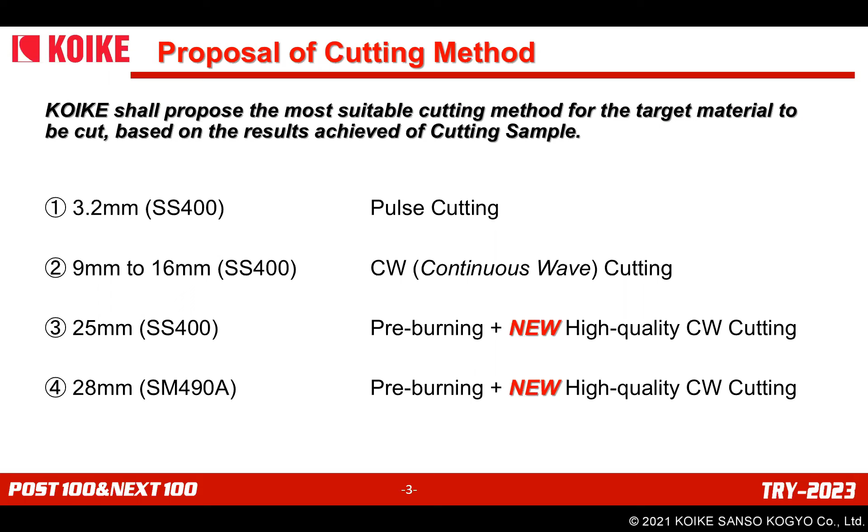Thick plate over 22 millimeters is usually difficult to cut, even by CW cutting with the 12 kilowatt single beam. The new 12 kilowatt DBC changes this, making it possible to cut plate over 22 millimeters effectively.

For steel plate with thick black skin like SS400 25 millimeters and SM490A 28 millimeters, this cutting achieves stable cutting and product accuracy. Even for unmanned operation, using this new high quality CW cutting with pre-burning, the quality is superb.

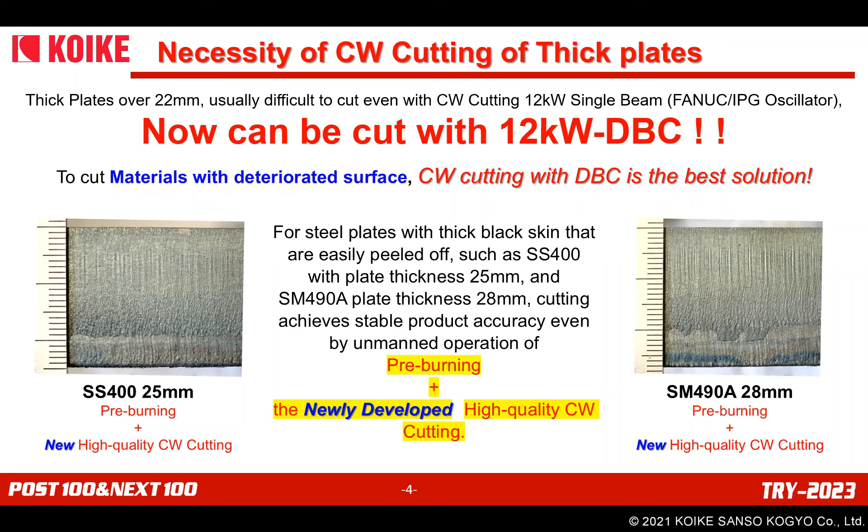Over the years, pulse cutting has been applied for cutting thick plates. The CW cutting has been applied to cutting thin plate and small items. However, due to the high output of fiber laser and advances in cutting technology, there have been some changes in usability.

But most importantly, what's the difference between these two types of cutting? What differs pulse oscillation from CW oscillation is the pulse frequency and the duty. While in pulse oscillation the duty changes between on and off, the CW oscillation is continuous.

As you can see here, the wave for the pulse frequency is changing on and off, and each one is a pulse. In the CW oscillation, there is no change - the duty is 100% continuous.

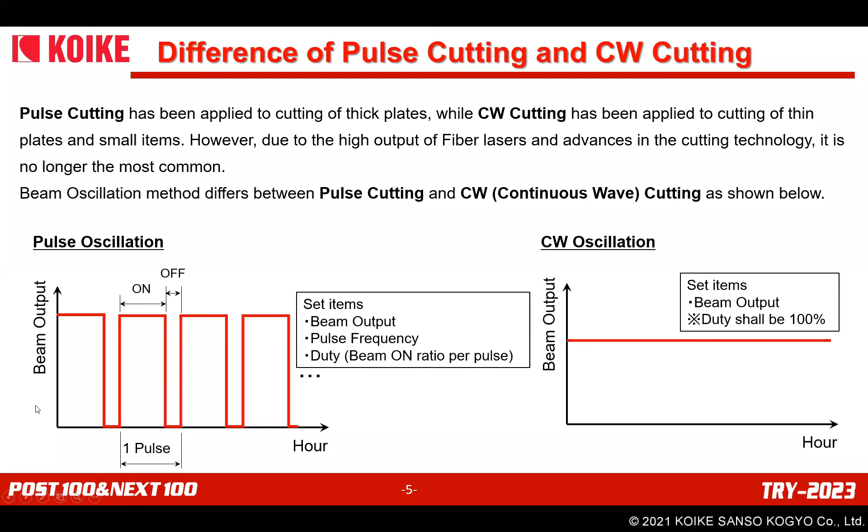Even though we are presenting some special function today, there is some material, as I said before, where we can use the usual cutting functions. So for pulse cutting, we can see some samples here - for the pulse cutting of 3.2 millimeter plate,

the cutting quality is almost the same between CW cutting and pulse cutting. So when cutting small shapes, like a small circle, the cutting speed must be reduced to achieve cutting accuracy. This reduces the beam output along with the deceleration. That is the reason pulse cutting is more effective for thin plates.

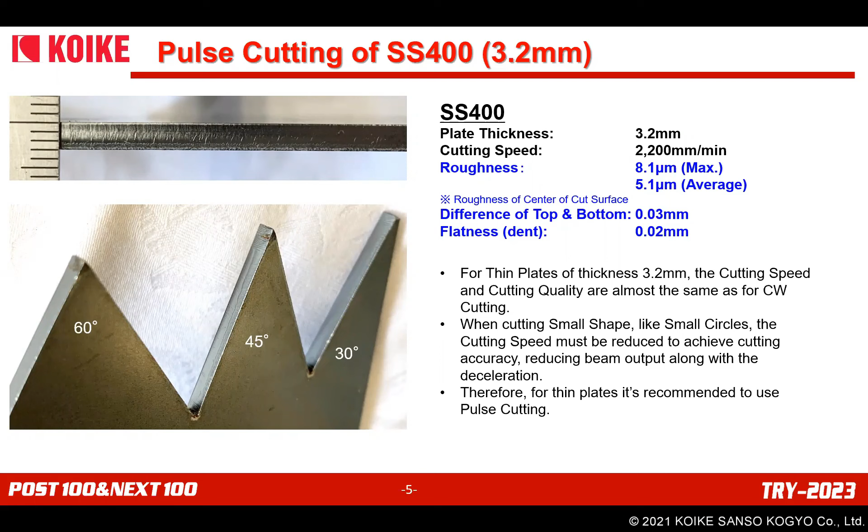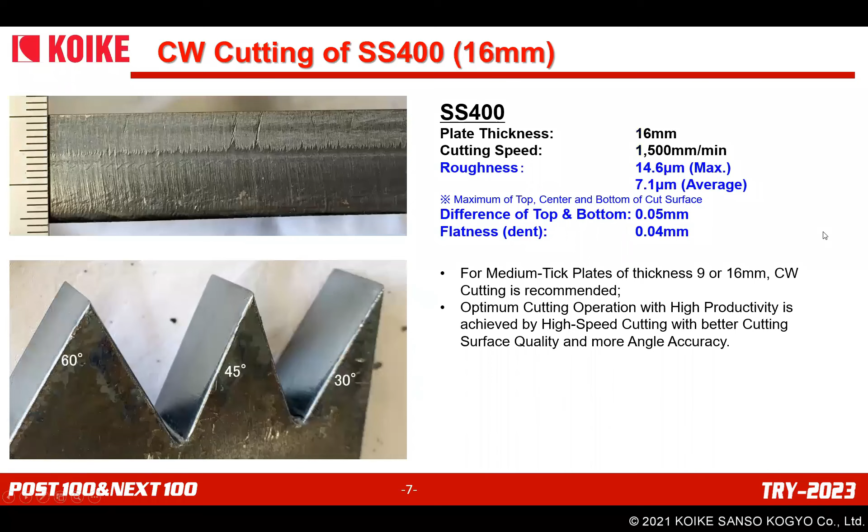For medium thick plates like 9 millimeters and 16 millimeters, the application of CW cutting enables optimum cutting operation that matches high productivity by high speed cutting with cut surface quality and acute angle accuracy. So the difference between the top of the cutting and the bottom of the cutting will be very small when you use CW cutting, and the surface quality is also better. Same for 16mm here.

When you start to cut thick plates by pulse cutting, the kerf width is very narrow. In this case, the flow of molten metal needs to be optimized by using a large nozzle diameter to increase the assist gas supply. But this also increases the difference of the vertical angle, so the difference between the start point, cutting point, top point and bottom will be much bigger when using a large nozzle diameter.

Also, the scratch and appearance will be bigger. In case of material with large amounts of chromium and silicon, the molten balance in the narrow kerf will be lost, and surface roughness, gouge, and dross adhesion will be even more in this kind of material.

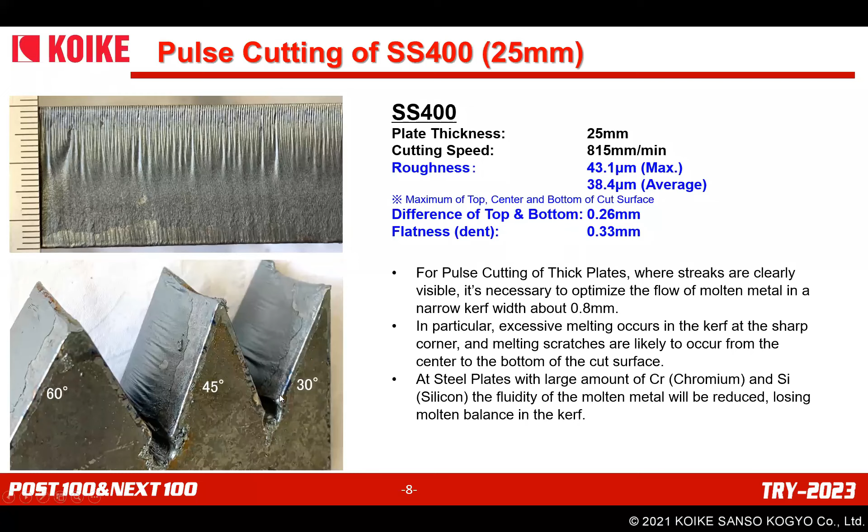Also, the sharpness in the corners will be affected because of the kerf width. But in CW cutting, the high output improves the cutting speed, which reduces the kerf width. It improves the flow of the molten metal and leads to a better cutting surface. So comparing pulse cutting and CW cutting, we can see an improvement in the roughness and also in the corners.

Although it has advantages improving productivity and sharpness quality, the current CW cutting technology may require some post-treatment of the cutting material, like oxide scale removal from the bottom side of the cutting material.

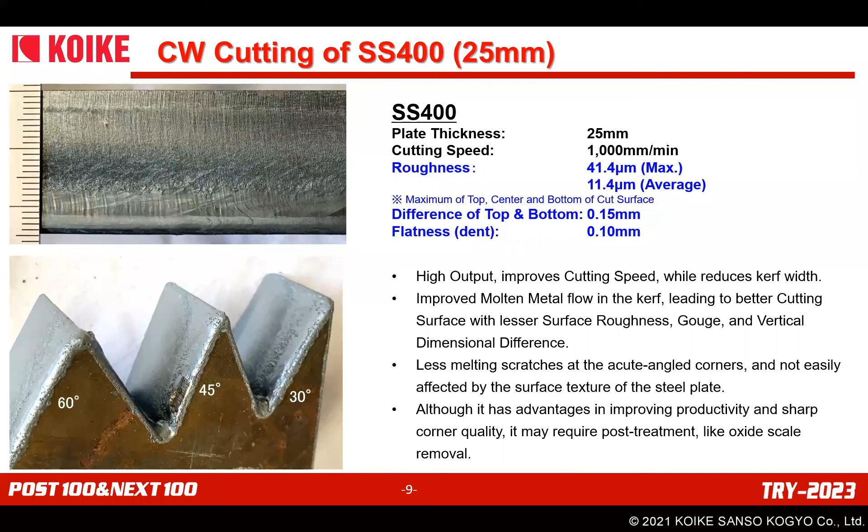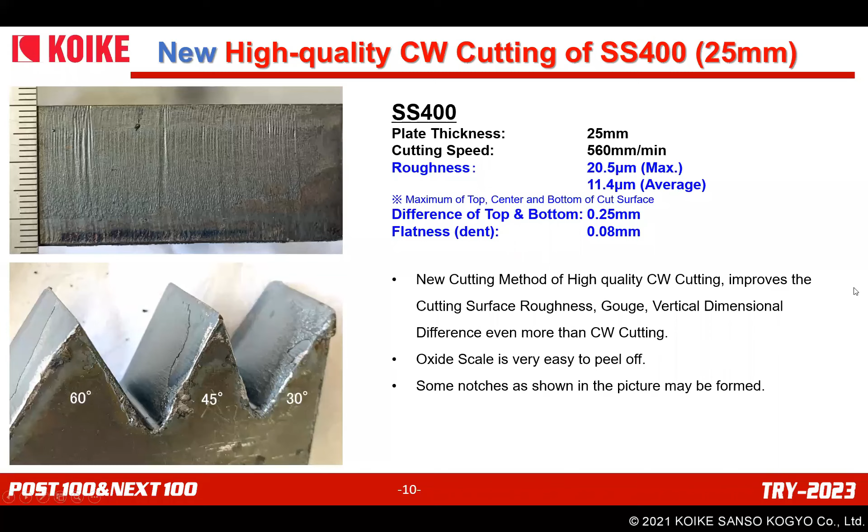The corner is also sharper and a little bit better than the previous features.

But when we apply the newest technology, the new high quality CW cutting, together with pre-burning, the cutting quality is even improved. In case of steel plates with thick black skin, performing pre-burning with high quality CW cutting provides a better cutting surface with almost no notches, no scratches here.

Cutting speed will also be slower, but applying these cutting methods to unmanned operation improves the results significantly by eliminating most of the negative factors of unmanned operation. It means even the stop for failed cutting will be reduced significantly.

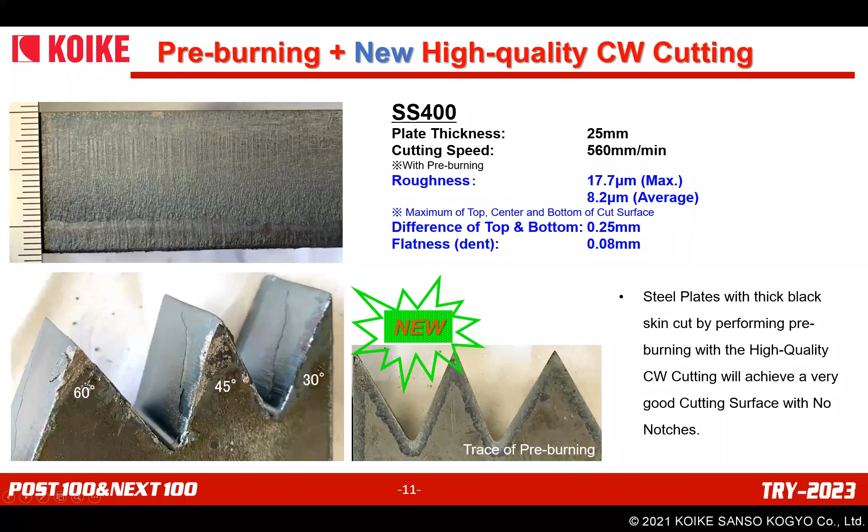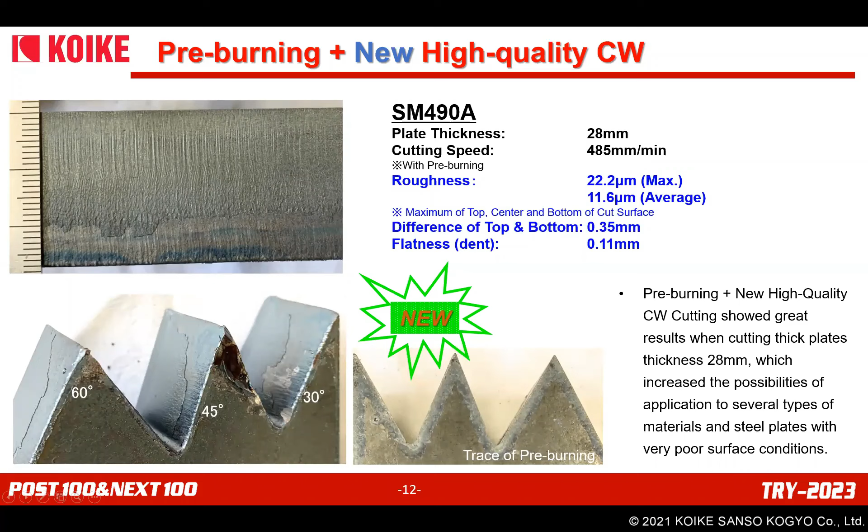So as we saw in the previous cutting samples, cutting of thick material with CW cutting single mode is not an easy job. But what's the reason for this? The thicker the plate is, the more beam output is necessary to increase the melting capacity. But the molten metal cannot pass through the narrow kerf the CW cutting creates. So it causes surface roughness, burning, as you saw in the example, and reduces the cutting quality to the point that it's sometimes not acceptable.

Of course, defocusing the beam to widen the groove may be effective, but in this technology, CW cutting single beam, the cutting becomes very unstable due to deterioration of beam quality. We can see this: when the beam is far from the plate, the deterioration is worst, and that is the problem it creates.

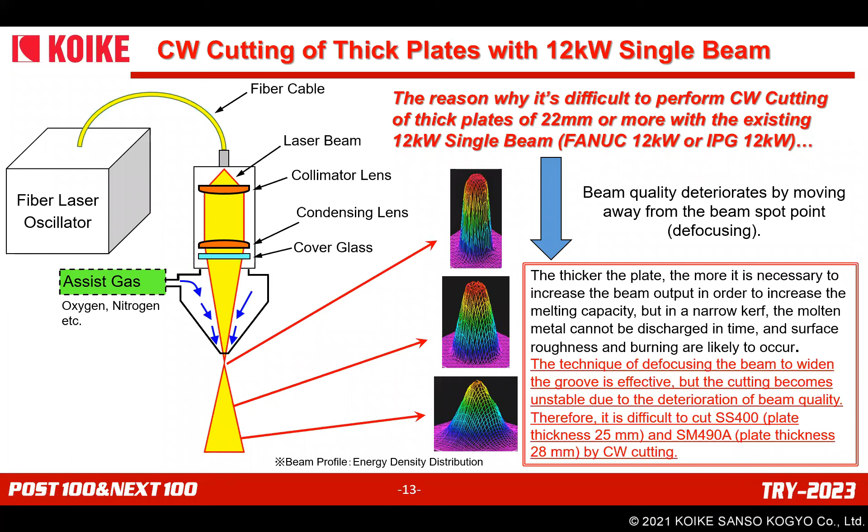So what is exactly the DBC technology? We saw the single beam. We understand well what the single beam is, and what the DBC is with dual beam control. While the single beam mode has only the central beam, the DBC has a combination of a central beam with a ring beam.

And in the DBC, the beam control makes it possible to control both beams individually. Doing that, we can adjust each one of the beams separately to find the best condition according to the material type, surface condition, and the surface temperature during the cutting.

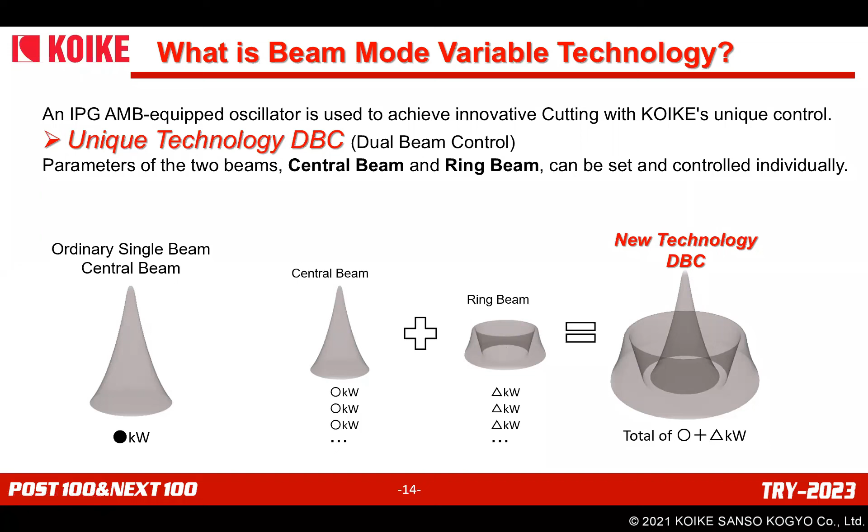So the main difference between the single beam and the DBC, the dual beam, is: in the single beam, the laser output is only one beam, while in the DBC the laser beam is divided into central beam and ring beam.

For single beam, it makes fast cutting into thin plates. On the other hand, it requires an increase of output for medium thick plate. But doing that, there's a risk of burning increasing depending on the difference in material surface condition and surface temperature. It's not possible to achieve stable cutting when cutting medium to thick plates using the single beam, since there is a limitation to high beam output and variable beam shape in the single output.

But in case of the DBC, it can change the beam shape in several ways, reducing the heat applied to the plate, preventing burning from happening, and you can find the best combination of beam output and shape according to each kind of material, surface condition, and surface temperature, as I said before. Also, cutting medium plate and thick plate, it's possible to achieve stable cutting with this feature, even for rust material and thick material.

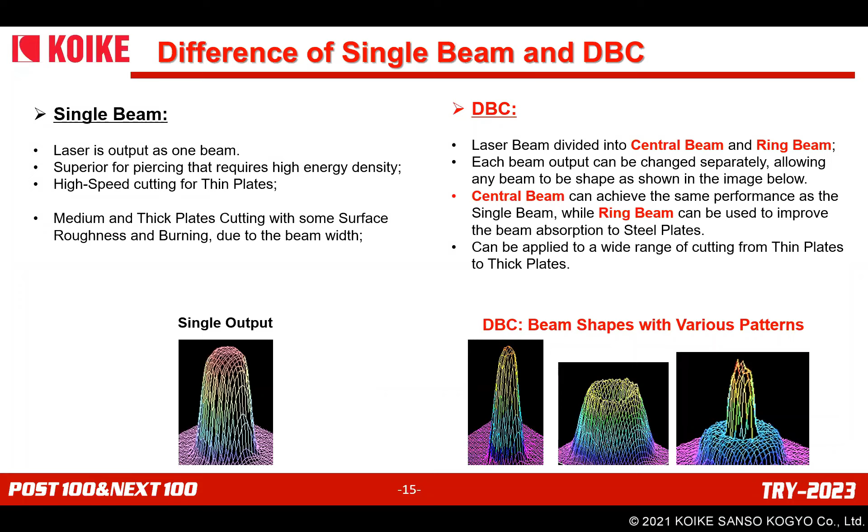So to maximize the capability of the DBC, three main points were newly developed specifically for this technology. One is the new cutting torch, which was developed in-house by KOIKE. In this torch, the design of the optical system components was completely renewed to match the DBC oscillator. Additionally, the optical components maintenance is now possible individually, significantly reducing maintenance costs.

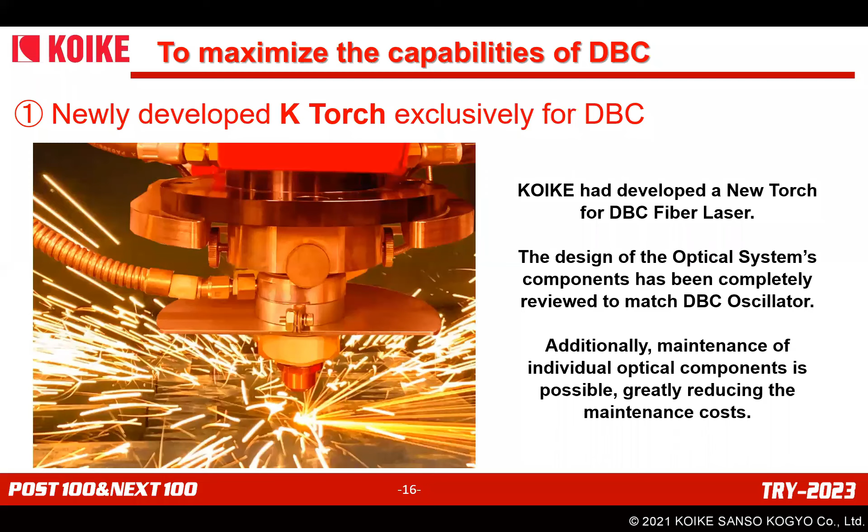Also, a new nozzle was developed specifically for the DBC. By using this new nozzle, we optimized the flow of the assist gas and shielding gas, improving the molten metal discharge. That solution gave fewer notches in the cutting surface.

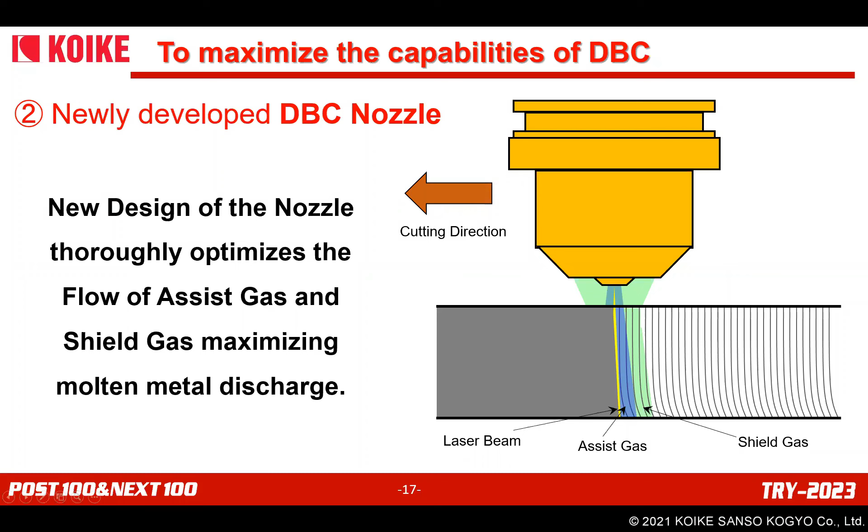In order to achieve the high level of contour accuracy for the CW cutting by this new featured DBC, KOIKE also reviewed the machine structure and completely renewed the driving system for this machine.

In this new model, the customer can choose whether the operation panel, oscillator, and chiller will be installed on board the machine or standalone, somewhere else. Before that, the FIBERTEX only had the possibility to have the operation panel outside of the machine, standalone type, but now you can choose onboard type also. The oscillator and chiller are the same, but for the fume collector, the only option is standalone type.

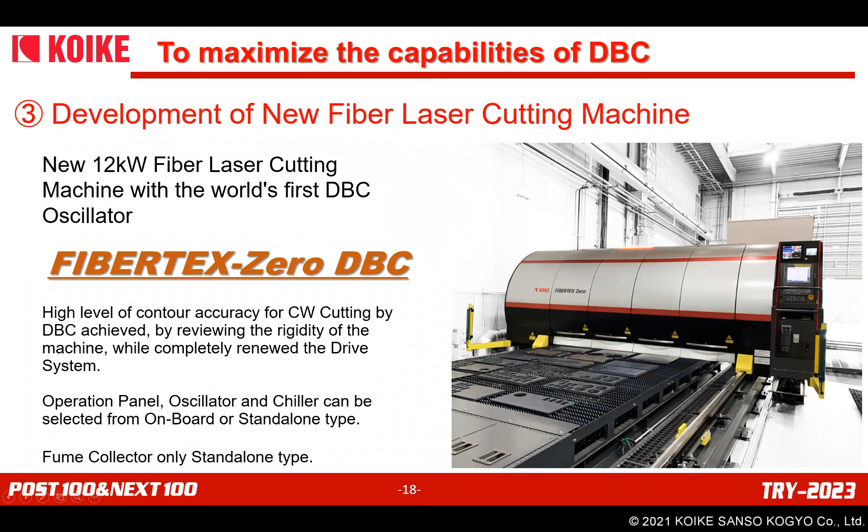I guess everyone knows the risks using fiber laser. Recently, never before in laser cutting systems has the light source been so intense and powerful than in fiber laser cutting machines now. Comparing to CO2, the difference is even bigger.

Differently from CO2, the beam of the fiber laser is way more dangerous. Since CO2 laser is able to cut both glass and acrylic, if the beam hits the eye of the operator, it may burn the cornea, causing discomfort and pain, but you can protect your eye using simple acrylic glass without any special requirement. For fiber laser, if the light strikes the eye, it passes through your cornea, and if it focuses on the retina, it will cause serious damage there. In this case, special protective glasses are required for using fiber laser.

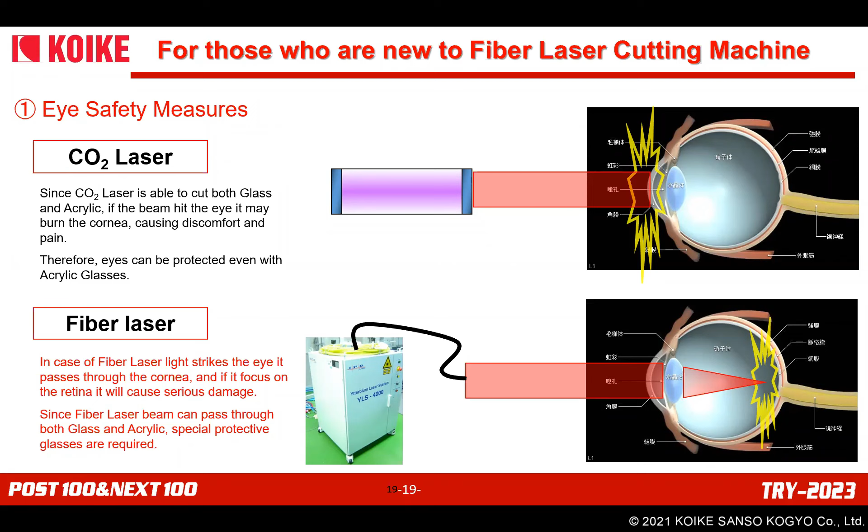Also, in order to achieve even more safety in the cutting shop, the setting of a laser control area is required for the fiber laser machine. Entering the control area during the cutting process is not allowed.

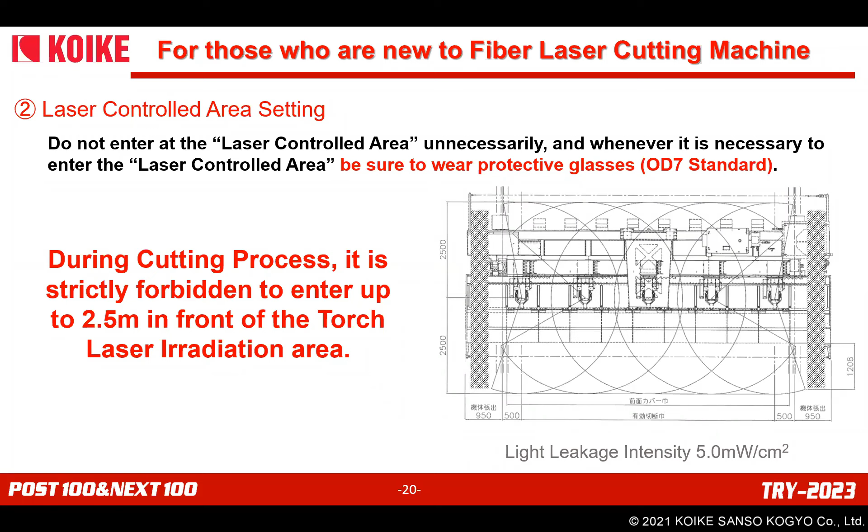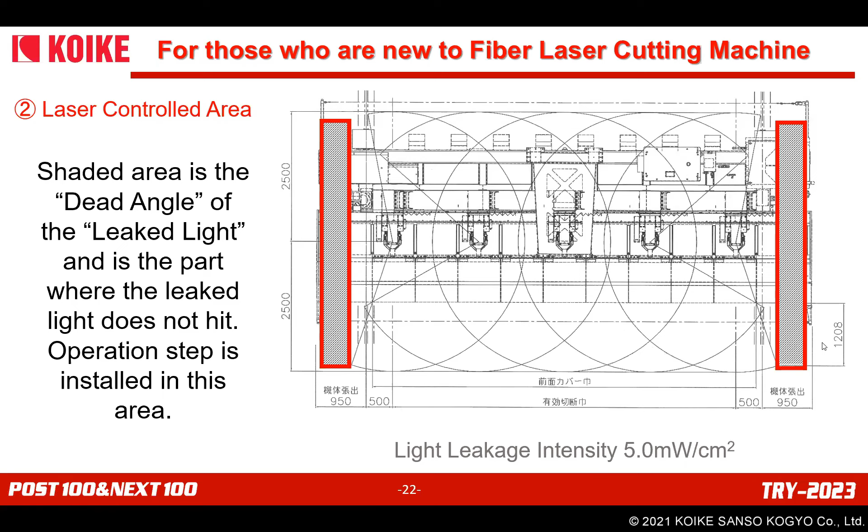The operation step is, when you choose the onboard type, the operation step will be installed in this area, here or here. The control area will be starting from the photoelectric sensor in the front side of the machine, like here. This part from here to here will be the start of the control area. So for operation of the fiber laser, you need to be far from this controlled area, something like 2.5 meters.

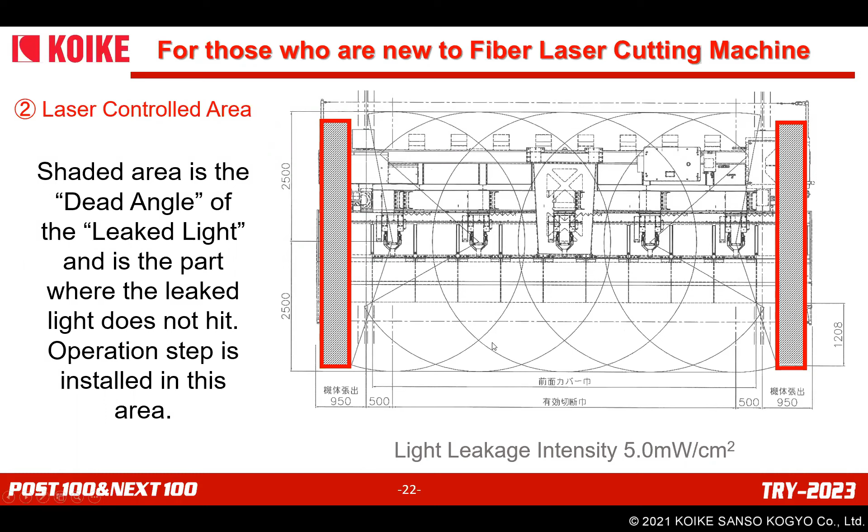Also, to increase even more the safety, we have a special design for the cutting table structure. It is specifically dedicated for fiber laser cutting and was also developed here for these systems.

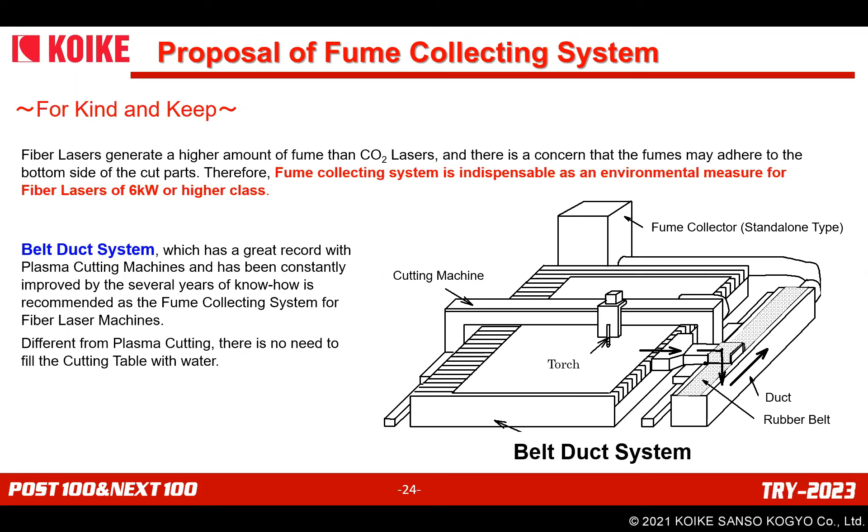Okay, this is what I have for today. Thank you very much and appreciate your time.